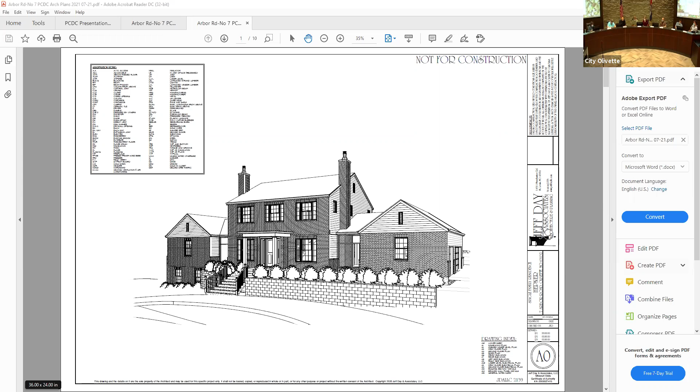Yes, bear with me one second, let me make sure I got my slide. Okay, so Chairman, we've discussed this memo in the past. We haven't had an opportunity to bring it back to the commission to have a broader discussion. It seemed like a good time to do so, as we've seen some.

Carlos, before you go on, our screens still have the participant screen listed. If you could just maybe close that. It's just the little one that needs maybe to be X'ed out. Oh, it'll just allow us to see. There you go, more. Thank you.

Okay, so if we take a couple of steps back and go down to 2006, when we adopted our comprehensive plan, one of the core components of the plan was regarding transportation connections. In there, it talks about transportation networks, the viability of maybe a future Metrolink station at I-170, and all of the I-170 interchange improvements. At that time, we were still under the old interchange before they did the single point urban interchange.

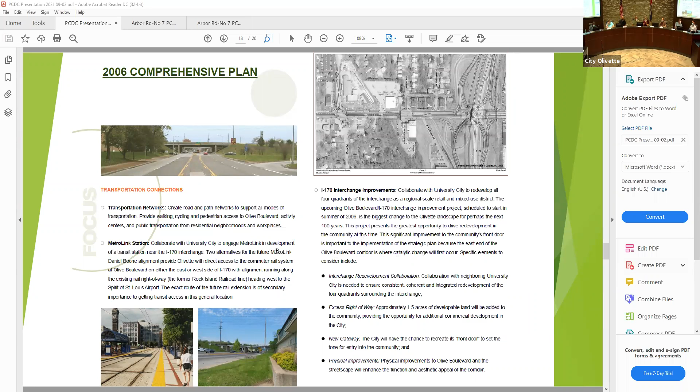And in addition to that, it talked about physical improvements on the Olive Boulevard corridor, the need to improve traffic management. Taking that from our 2006 comprehensive plan, we created chapter 428, which created our streetscape cross section to make the corridor a little bit more pedestrian friendly, or recognize pedestrian movement along the corridor. Not only is it a state highway, but it's also our main street, and it gave us some guidance in terms of how to best utilize the excess right of way along the corridor, and to create some type of defined pedestrian space and an identity for all of that. This is kind of the details that chapter 428 articulates.

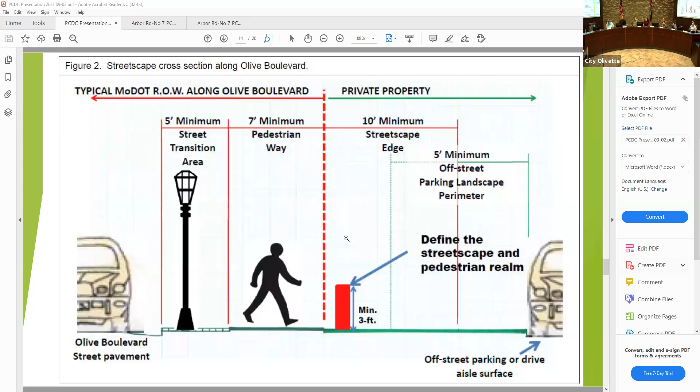Now we're trying to get more specific, give more guidance to developers of what expectations are. Look at ways to increase and improve traffic flow, improve access control, find natural pedestrian crossings to improve that north-south connectivity along the corridor, recognize and attract the users of 39 North, which is the agricultural bio area just west of us in Creve Coeur, and identify opportunities for creating spaces in there. And that's one of the other core components of our strategic plan.

They prepared this, which kind of identified some of the opportunity areas here at Dielman, Indian Meadows, and Old Bonhomme Road.

Looked at the 3 segments of town, the east, center, and west, and looked at opportunities to improve north-south connectivity in our community, and how to better access and manage traffic throughout that corridor. They did a pretty nice job in that process of putting that together.

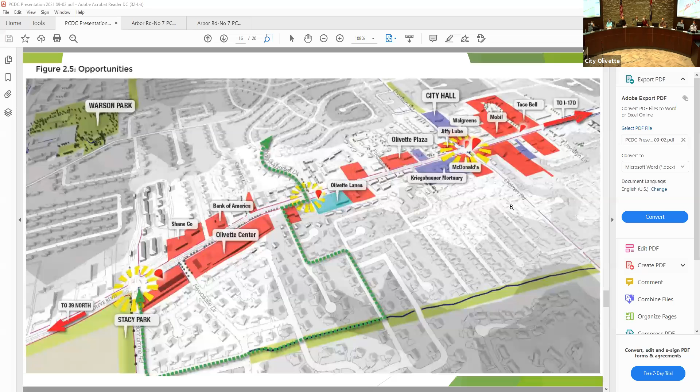But what we also learned is that we still had issues in that area with concentration of traffic, because of the industrial park, the residential areas, and the improvements we were seeing there. So we hired Crawford Bunte Brammeier to do an analysis of ways to improve and manage traffic in this area that we call the Northeast Quadrant — between I-170 on the east to Dielman Road on the west, north of Olive.

In this area we have our industrial park, commercial business park, city center, several multifamily developments, and a large area of single-family residential units and townhouses in the Arrowhead, Collingwood, and Brightling areas of town. Within the industrial park, we know we have over 3,500 employees that utilize this area throughout the day.

Enterprise Fleet Management is of course the largest employer in that area, but we also have two other sizable employers with close to 500 people — US Bank and Intelligrated — and then several with over 100 people, like the Medical West facility, HDIS, and Murphy. So we have quite a concentration of employers in that area.

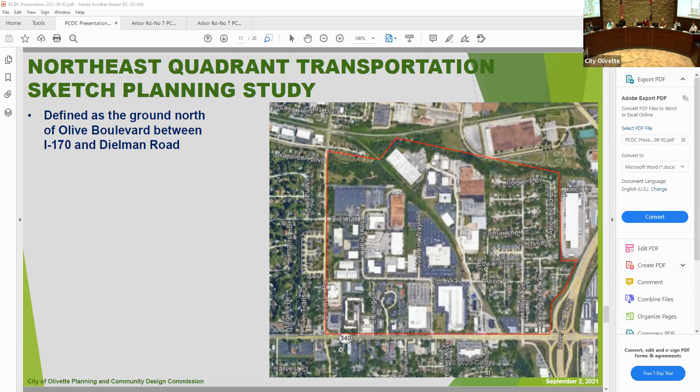Okay, our next scheduled commission meeting - the last day of Yom Kippur falls on the 16th, so we agreed to cancel and look at potentially rescheduling. I'm still not clear in terms of the 23rd. I think I'm in much better shape now, but to ensure that I have a quorum, I believe Mr. Lewis and Mr. Spiegelglass would have a conflict on the 23rd, so that leaves me down to 5 members.

If everybody else is okay, at least for now, just give me a heads up if anything arises. We'll go ahead and do that. We do have two homes pending review, so that'd be great if we can continue that. It's much easier than looking at the 30th, which is the second option. When that happens, the following week is our next meeting, and it's hard to get enough stuff done to have a productive meeting.

And then for November, our schedules are the 7th and the 21st. October, that's correct, the 7th and the 21st. Pending petitions, we have new homes for 179 Stoneleigh Towers, 8 St. Alfred Road. That will be coming before the commission hopefully for our September meeting, along with the continuation of 7 Arbor Road.